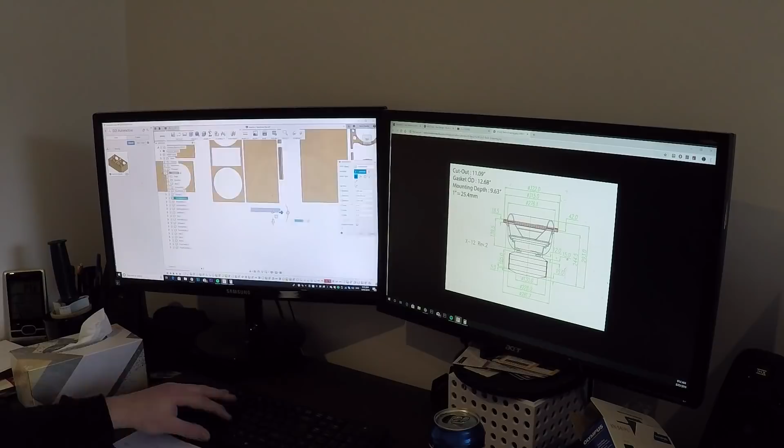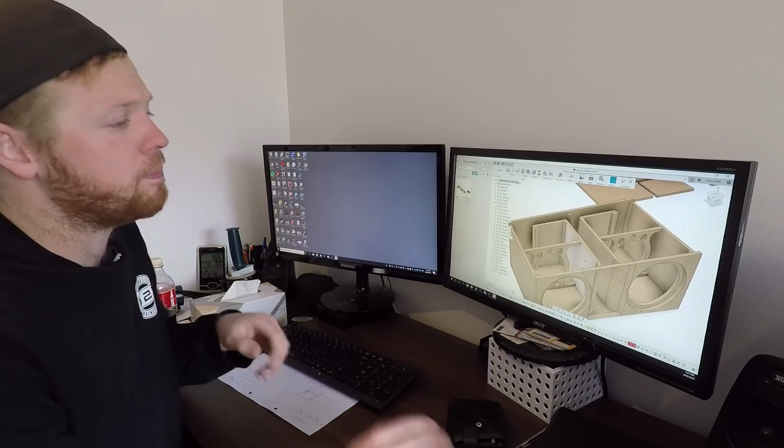Alright, so I've got the box all designed up in Fusion 360. So I've got a full 3D model here of what I'm planning to build. Nice curved port, so shouldn't get any turbulence, and the port velocity is kept well below 30 meters per second, so we should be right in that regard. I've done some calculations, and by the time I took out all these internal structures and a bit of bracing and all that sort of stuff, we've got between 4 to 4.5 cubic feet.

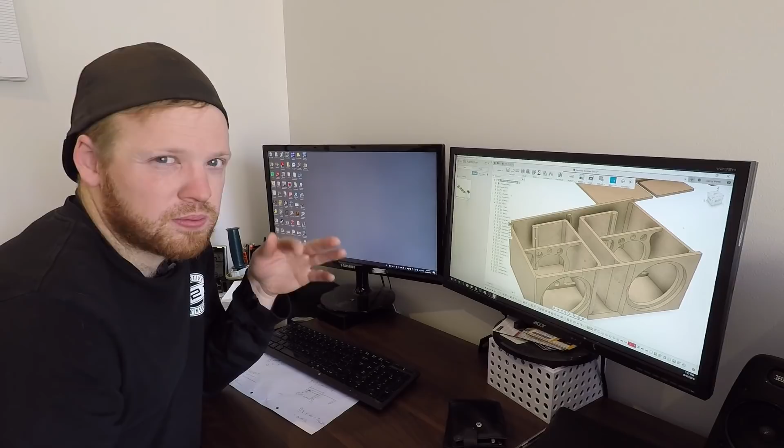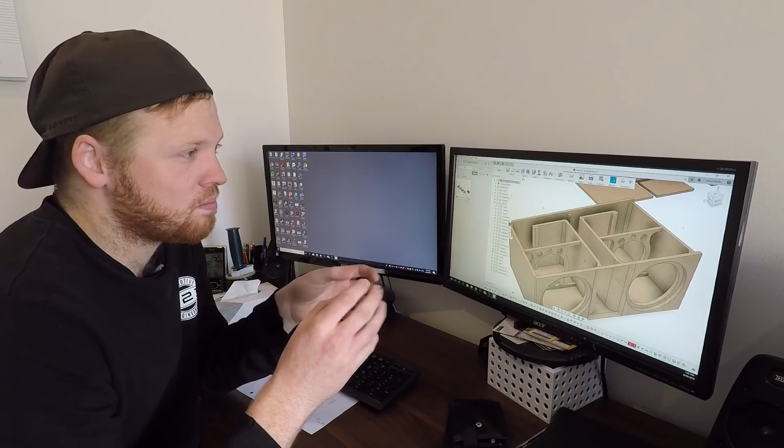Now, Sundown recommend a 5 cubic foot box for these subs, but I've compared them in BassBox, I've compared the curves, and there's really no difference between what Sundown recommend and this design. I've tuned it a fraction lower, so if anything, this box actually, in theory, performs better than the recommended. Still a flat response, still should play the lows, still should play the highs very well. So yeah, this is the design.

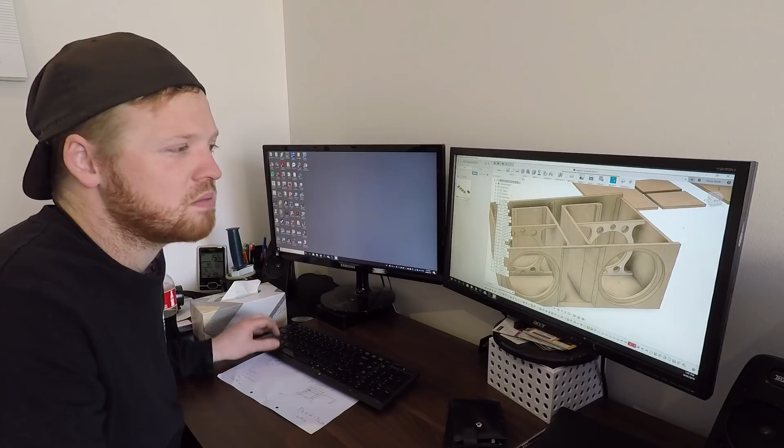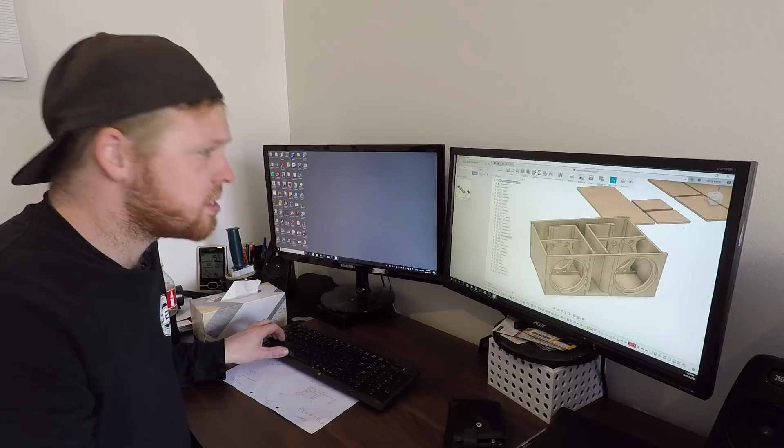As I said, it's got a curved port, so nice smooth exit, no real sharp right corners. A few roundovers internally. This bracing will house the magnet, so that way it's supported, because it's such a heavy sub. I didn't want it just free hanging and putting so much stress on these front beams. So I've gone ahead and exploded this. So we have this layout here, which is all the components needed to make this sub box.

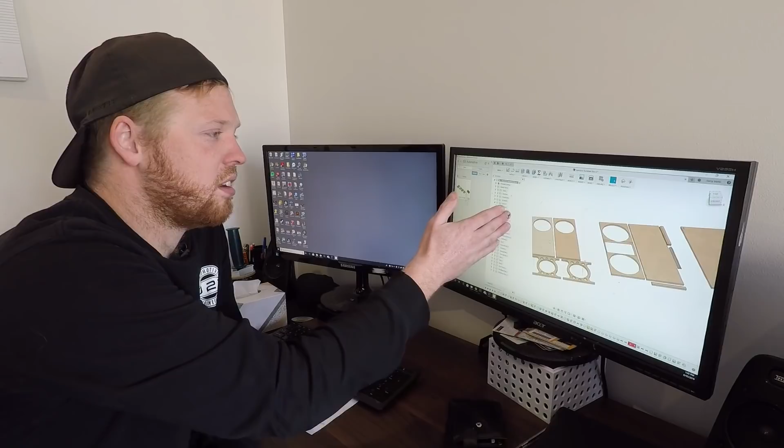So now I can go ahead and cut each one of these individually on the CNC machine. I mean, I've got a CNC machine, so you might as well use it rather than make work for yourself. I've done it plenty of times where you've had to cut this by hand, but if you have a CNC machine, it makes life easier. So I'll cut these individually because my machine only does a 900 by 1200 cut area. So I'll cut this one first and the next one and so on until we have all the pieces done, and then I'll be able to start assembling the box.

So I think we might leave it here for now, and the next episode will be cutting out the box and building it. So stay tuned for the XR6 taxi install.